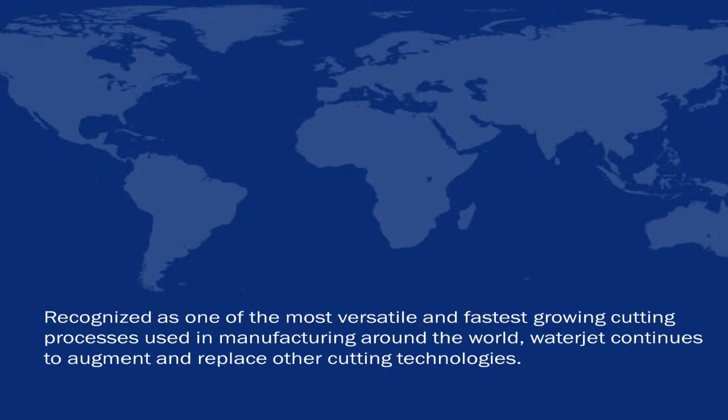And we're going to tell you a little bit more about the key components in selecting a waterjet, some of the trade-offs between technology and the advantages of Flow International and our long history, our breadth of product, and our technology. So Flow is recognized as one of the most versatile and fastest growing companies in waterjet, and waterjet itself continues to grow in popularity and applications. As we've expanded the capabilities and the ease of use, we've seen more and more customers needing this technology for its versatility, for its no heat effect, no post-processing, and for being a green process.

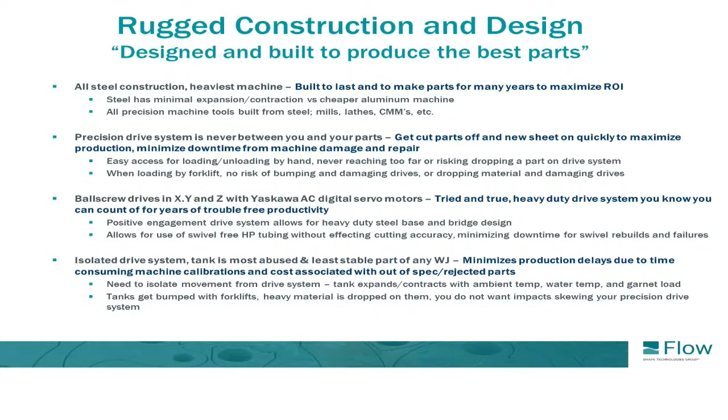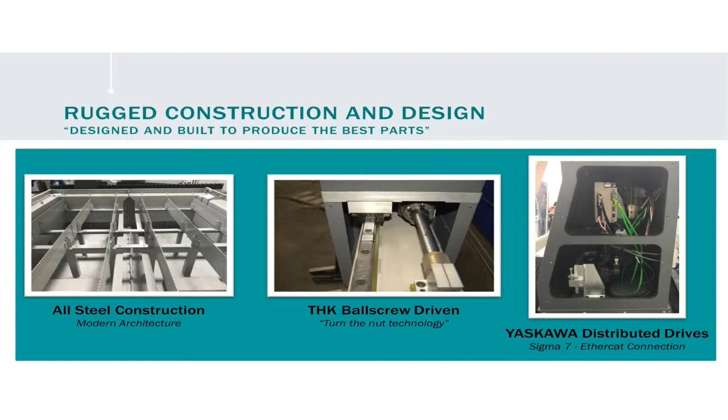World-class service and support. Again, along with the structural integrity of our machine and the technology that we could offer, this is truly what separates Flow from our competitors. Our service, our support, our tech service, our engineers are all local in this territory. We have over 11 technicians in the Northeast alone. That means that we're not flying people from Ohio or Washington to give you service. We're an hour or two away and can be in your shop as you need us.

That's very important to us, and something that we rely on. We also have local tech service management right here in the Northeast as well. So you're not calling a corporate 1-800 number. There's someone locally who can manage the schedule and get you the service you need when you need it.

Flow offers a wide variety of service options. You could, of course, always call in with any unexpected issues. We have 24 hours, 7 days a week phone service. There's also a Flow app that you can download right on your phone, and you can interact and get support right through the Flow app without having to go back to your computer.

And then there's also maintenance plans that come with our new machines, which have Flow in to help service your machines before it's time for rebuild. So we are eliminating the challenges of the break-fix model that our competitors use and that water jet suppliers have used traditionally. We put you on a maintenance schedule where we keep track of your pump hours, and every 500 hours of runtime, we will be in to rebuild your pump, inspect the machine, and make sure your machine is doing exactly what you need it to do.

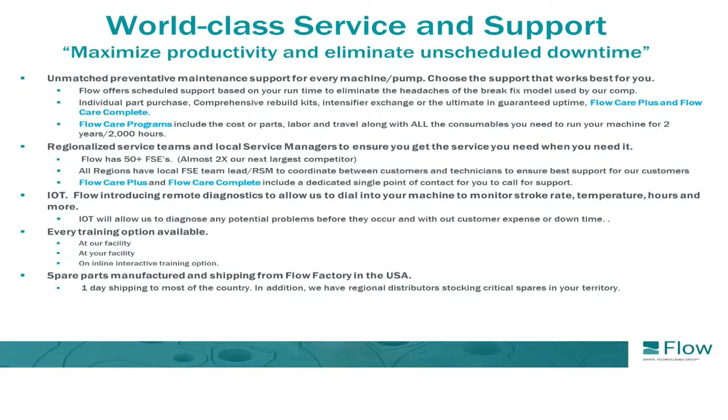Oh, spare parts. Spare parts as well separates us from our competition. We manufacture and stock our parts in Baxter Springs, Kansas, which is 1-day shipping. And we're also stocking parts right here in Harrisburg, Pennsylvania at Mid-Atlantic Machinery to eliminate any lead time for your water jet needs. Mid-Atlantic also has a technician available in addition to our 11 guys from Flow. So again, another layer of support.

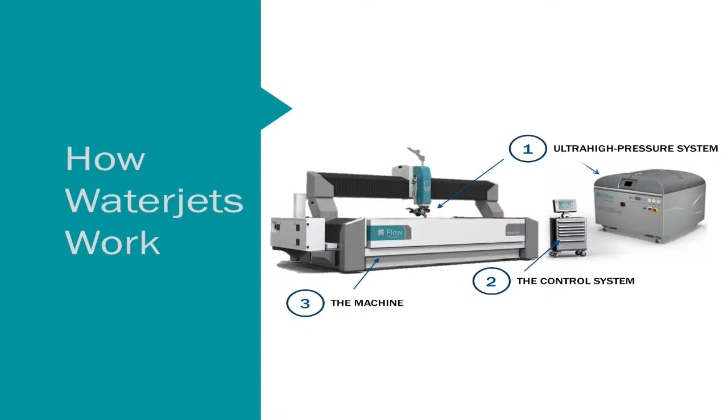So how water jets work, and again, there's a lot of information, so we're gonna go through this relatively quickly.

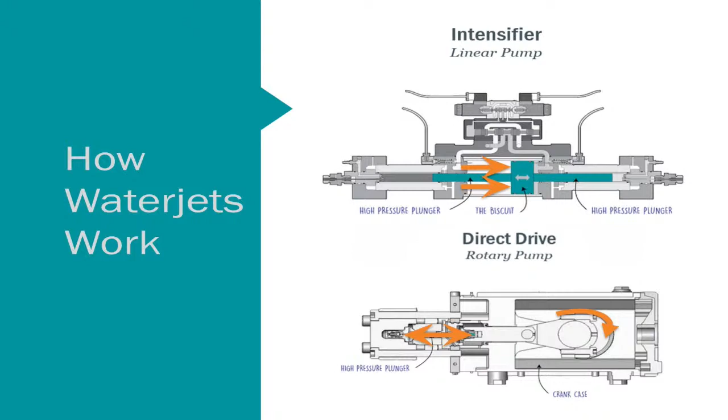All of our competitors offer one or the other. The vast majority, just about all, only offer the intensifier pump. There's only one supplier I'm aware of that's still offering the legacy direct drive, and that's Omax. And they both have their sweet spots. It depends on what your production and application is. That'll dictate which pump makes most sense for you. And again, we're the only supplier who can offer every pump option available in the industry.

So abrasive water jet, you generate pressure at the pump between 60 to 90,000 PSI. That water gets pumped through to our cutting head through the overhead whip. Some of our competitors have plumbing that requires swivels, so you're pushing the water back and forth. Those are maintenance sore spots, and you also lose pressure with every swivel you go through, which is why Flow uses the high pressure whip to eliminate any of those concerns.

So that high pressure, that 87,000 PSI and whatever horsepower pump that you're using, gets pushed through to your cutting head. That's where that pressure is turned into velocity. And then after going through the cutting head, you go into the mixing tube where you pull in the abrasive, the garnet, and it allows you to do that cutting on hard materials.

There are many materials where you don't need abrasive. Softer materials, whether it's gaskets, rubber, foam, softer plastics, you could cut those with water only, which will give you a thinner stream of water and also saves you on the abrasive costs. And it has some advantages. The rule of thumb is that anything that you can cut with a household scissor, you can cut with water only. If you can't cut it with a scissor, you're going to need abrasive.

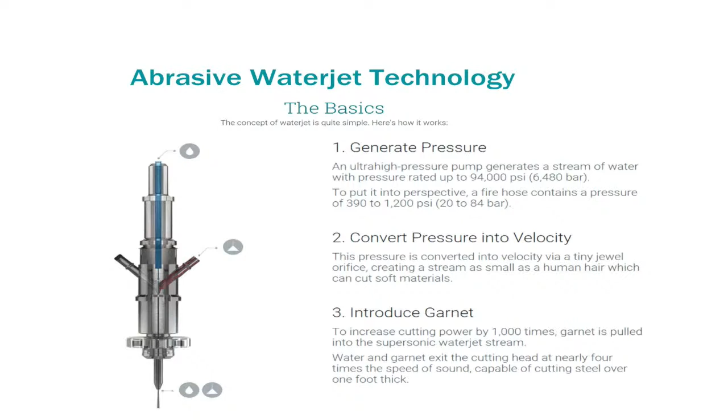So again, this shows you a closer view of the process. The water comes in, abrasive gets pulled in using the Venturi process, and then comes out through the mixing tube. If you're cutting more sensitive materials, brittle materials, glass, composites, anything that could see fractures, micro cracking, delamination, you may need a vacuum assist, which is a very cheap add-on to your machine, probably under $1,000.

And what that vacuum assist does is gets the abrasive going to the mixing tube without the vacuum process. So it pushes the abrasive using your air compressor as opposed to pulling it in. And this allows the abrasive to hit the material with the water at the same time, which eliminates all micro cracking, micro fractures, and delamination.

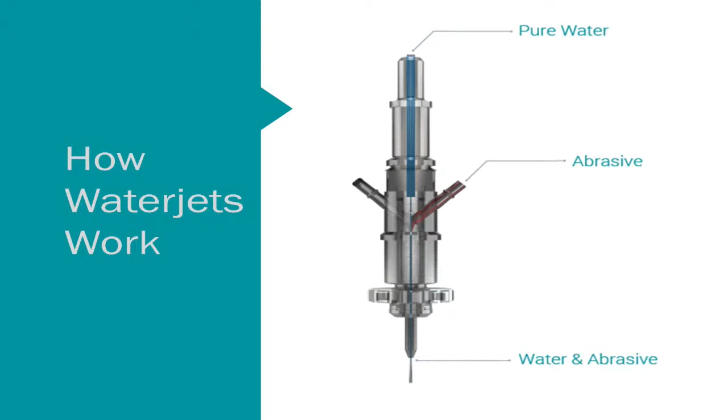So the advantages of water jet: cold cutting. It's a no heat process, so you don't have to worry about the HAZ or heat-affected zone that you'll see with some other technologies. The major advantage above all of these others probably is the versatility. What makes water jet unique compared to laser and plasma, which all have their sweet spots, is the ability to cut any material and any thickness. You can go from steel to stone to glass to rubber to wood with no changes to your setup. It's very easy to cut all those materials without doing anything special, without having to spend a lot of time changing your setups.

And again, the thickness. Water jet will cut through virtually any thickness material. The machine that we're going to be showing you today has a 12-inch cutting capability. You can get that same machine with a 24-inch capability or beyond. So whatever your requirements, as thin or as thick as you need, the water jet will be able to bring value. No stress added to the part. Again, it's an erosion process more than a cutting process.

And then the ease of use. You can go from art to part in a matter of seconds or minutes. You're working from any native file format. Our application specialist will show you in detail just how easy it is to get parts cut on your water jet.

And then environmentally friendly. The waterjet is a green process. You don't have to worry about hazardous waste or hazardous materials. The abrasive comes in. The vast majority of customers are using garnet, the Barton garnet, which can go to drain, it can go to your dump, it can go to your landfill. There's no special handling or requirements needed. And the same with the water. The water can go right to drain.

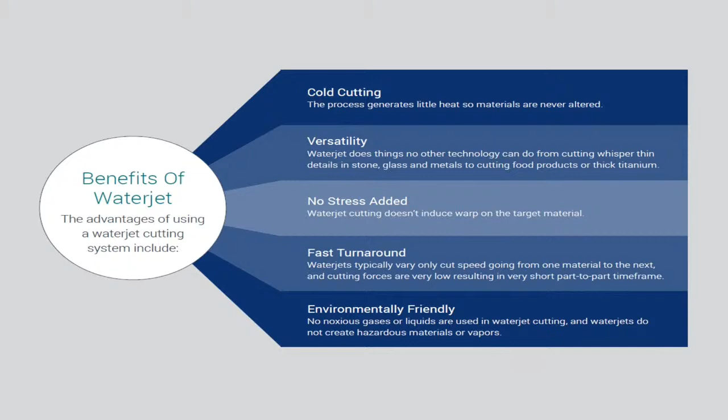Again, all the different materials that we can cut, whether it's Inconel, titanium, stainless. The only material in the world that I've seen waterjet struggle with, and this is across all waterjet suppliers, is tempered glass. Tempered glass, as you apply any pressure to it, it's designed to shatter. But we're working on it.

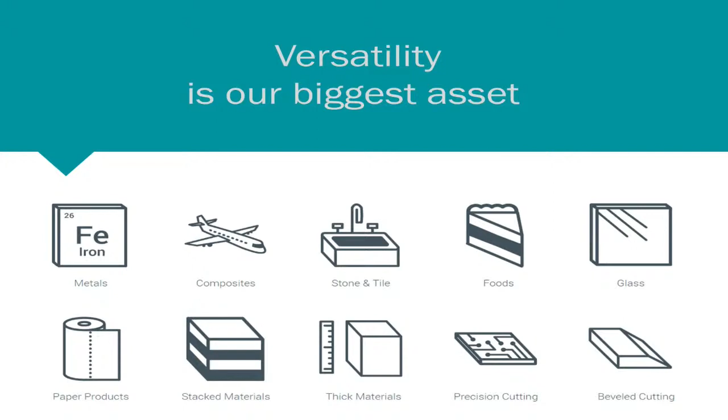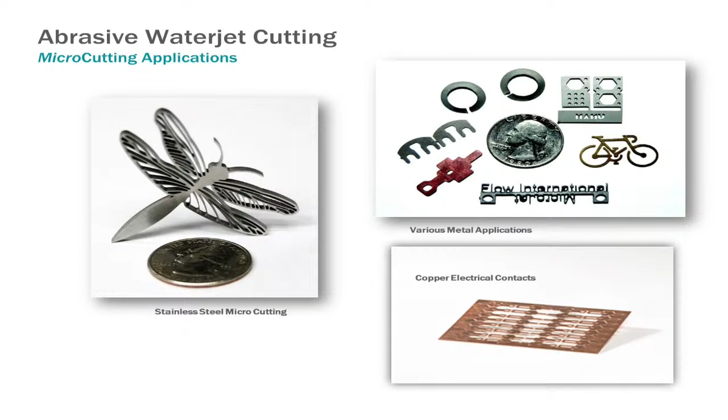And here's just some examples of some of the applications that you'd be able to do with the waterjet, whether it's extremely fine and detailed work. With pure waterjet, you can get down to 5 thou kerf. With abrasive waterjet, it's a little over 30 thou, about 33 thou. It's usually 10% over the size of your mixing tube. So again, the ability to cut extremely precise and intricate parts. Nesting as well, and again, just showing you all the different applications that you can use for waterjet.

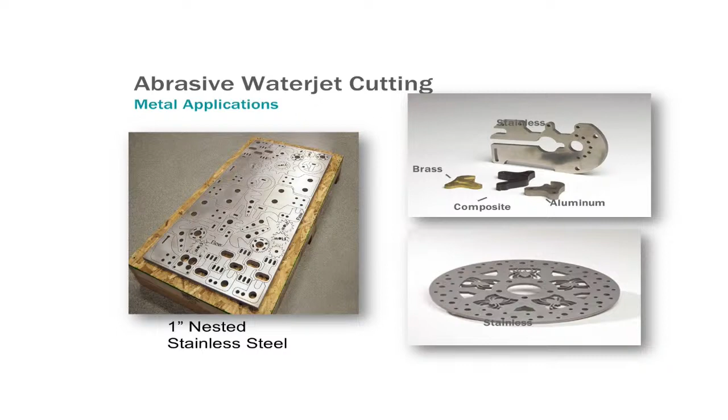We talked about thin, and we could also talk about thick. We've got a lot of customers today cutting 12, 14, 16-inch various material. We have a customer up in Rochester that's been cutting 14-inch glass for a space application with the same Flow machine since 1995. Again, that speaks to the quality of our machines. You can have a 30-year plus machine cutting space tolerance parts without any issues.

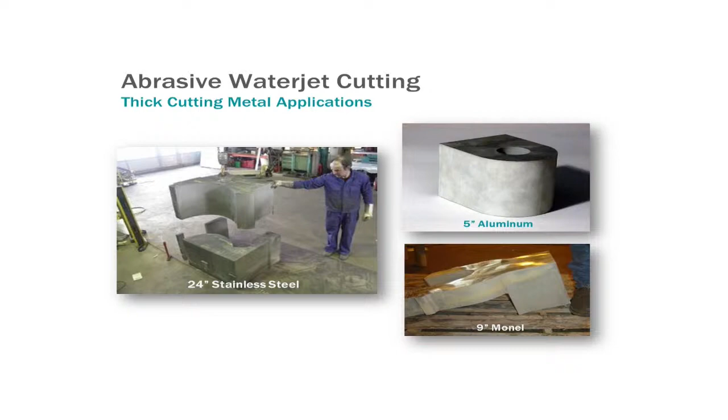Waterjet supplements a lot of other tools in the industry, whether you already have a plasma or a laser. The waterjet will bring value and bring capability and open up applications that you couldn't cut with some of these other technologies. And that's because of our versatility and the process itself.

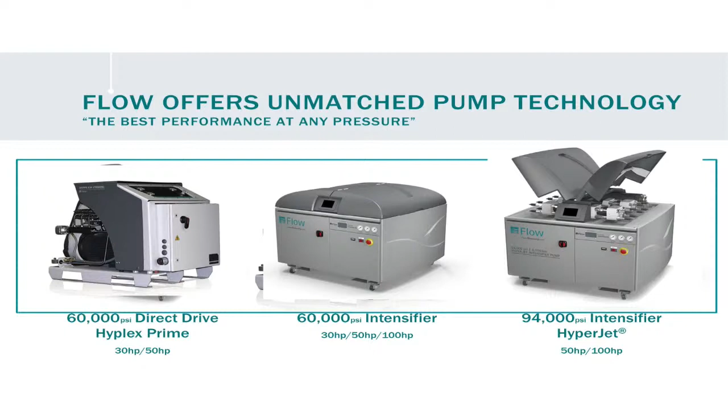So pump technology. We mentioned that Flow invented every pump style available in the industry. So that starts with the legacy direct drive pump. Again, tried and true. It'll be able to cut all the same materials as an intensifier pump and even a higher pressure intensifier pump. The difference is going to be speed, operating cost, and maintenance. So the intensifier offers more flexible maintenance, less maintenance, and it also allows you to cut faster and reduce your operating cost. And we'll talk about how we do that in these upcoming slides.

So this is why the vast majority of our customers have moved to this hyperpressure, to this 87, 94,000 PSI, because they're able to cut 20, 30% faster while reducing their operating costs by close to 50%. And that is huge. So the biggest operating cost with waterjet is that abrasive, that garnet that gets pulled into the system. It's not expensive, but you use a lot of it.

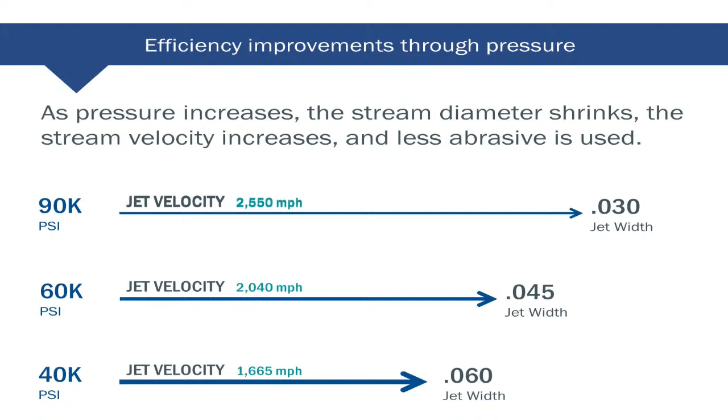So abrasive garnet costs about 25 cents a pound. And depending on your pump, you're using between 0.8 to 1.2 pounds plus of abrasive. By going from the 60K pump to the 90K pump, you're bringing down that abrasive usage from 1.2 pounds a minute to 0.8 pounds a minute. And that has a huge impact on your operating cost, which allows you to see more profit and be able to quote more aggressively to your customers.

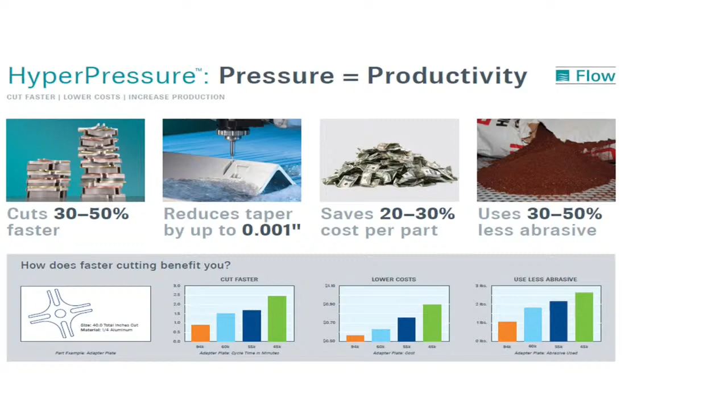So here's illustrating some of the things we were just talking about. Again, cutting 30 to 50% faster, reducing that kerf or that taper by having that thinner stream of water that is entraining less abrasive. You're also able to cut finer detail with that higher pressure pump than you could with the 60K. Very critically is that cost savings. Like I said, you're going to use 30 to 50% less abrasive, which translates directly to operating cost savings.

And this speaks to the speed difference by going from 60K to 90K. You could see as you go up in pressure, you're increasing your speeds, you're reducing your cycle time. This is a tremendous advantage of the higher pressure pump, and again, the reason that most of our production customers have moved to the higher pressure.

And we do offer every option. So if you're not running full out, 6 hours a day, 8 hours a day, 18 hours a day, a direct drive might be a good option for you. And we have the best direct drive in the industry, more modern and up to date than any of our competitors.

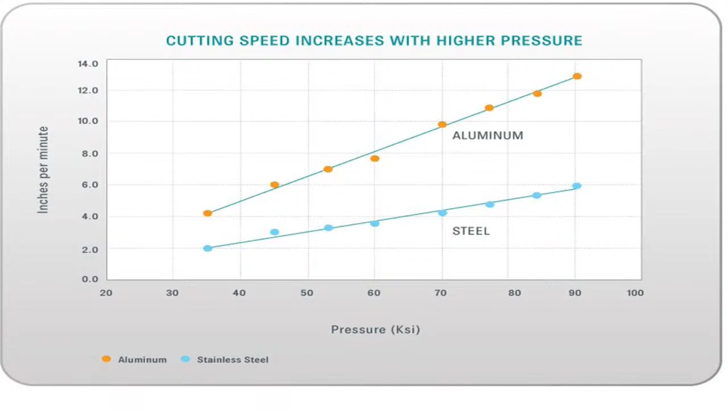So as I was saying, as you go up in pressure, you're reducing that diameter of your jet stream. That equates directly to abrasive usage. If you look at the bottom of this screen, you could see by going up in pressure, you're increasing the speed, you're going faster, and you're reducing your cost.

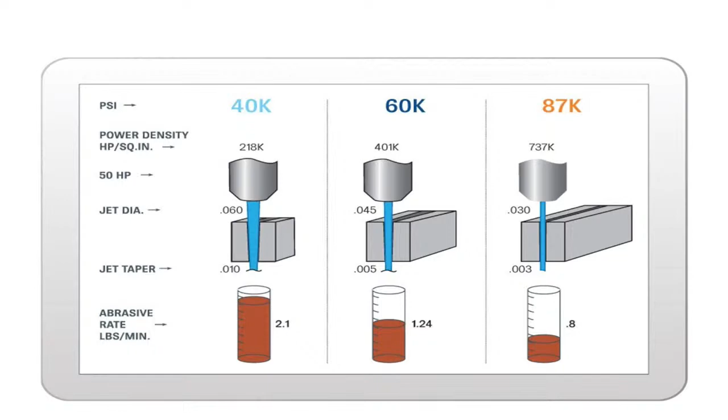That makes the higher pressure pump make a lot of sense for a lot of customers and a lot of applications. But please, let us have the conversation. Let us talk about what you guys are doing. We want to learn more about your process and see what you need from us to bring value.

You can run them below their max rated capacity of 87K and still be going significantly faster than a 60K pump and still saving a lot of money on abrasive. And you can extend those intervals from 500 to 1,000 hours or beyond. So it's available in all horsepower options, 50, 100, up to 200 horsepower and beyond.

This is key. So the intensifier pumps use slow stroking hydraulic technology. So the intensifier pump compared to the direct drive pump: the direct drive pump has 3 cylinders to rebuild every time you do the maintenance compared to the 2 cylinders of the intensifier. So it's 33% less maintenance every time you do those rebuilds.

And the reason why the intensifiers have less wear and tear is they're much more gently stroking. So a direct drive from Flow or from our competitors, you're going to be seeing a stroke rate of 700, 800 strokes a minute. An intensifier only strokes 70 to 80 strokes a minute. That is proportionally less wear and tear on your pump, and again, extending those maintenance intervals.

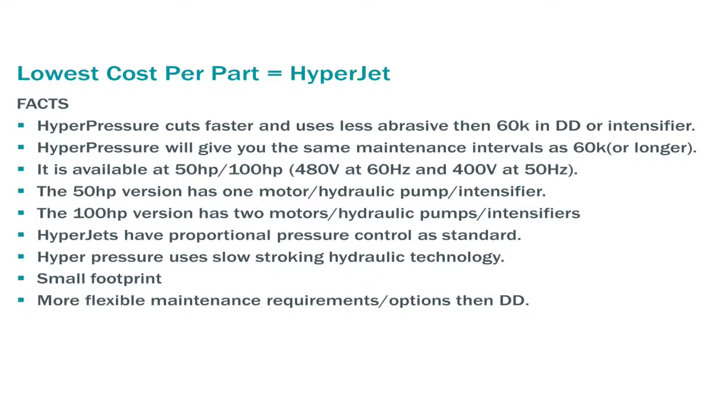And also, another key advantage of the intensifier is that you could swap out that complete unit. So if it's time to do a rebuild and you're in the middle of a big job that you have to get out by Friday and you don't really want to spend a couple hours doing a pump rebuild, you could take your intensifier pump off your pump cart, put in a replacement intensifier, continue to cut, and then go do the rebuild on your intensifier at your convenience, whether it's on Saturday, the following week, or whenever works best for you.

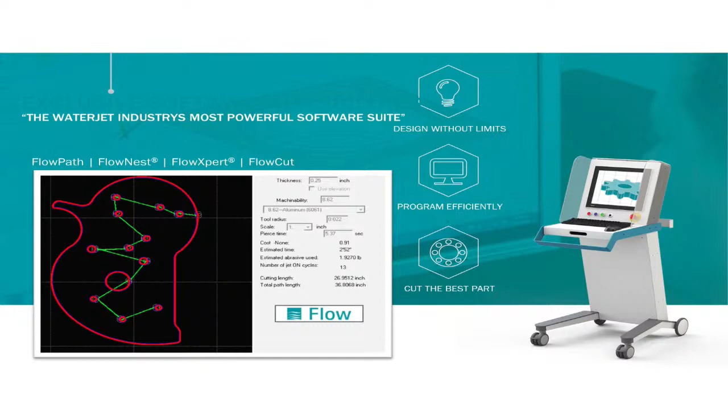So our software, the machines run off a proprietary software, FlowXpert, Flow Master, extremely intuitive, extremely easy to use, Windows based. It's a CAD CAM package. We're going to be walking you through the software programming and just how easy it is, working from any native file format. Our application specialist will be showing you that in a couple minutes here.

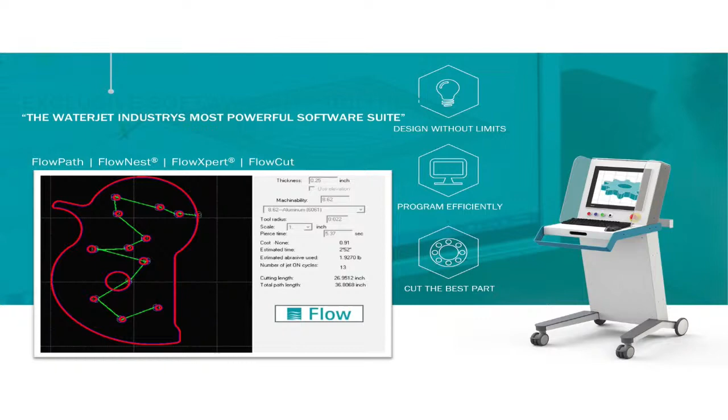So another advantage and what customers love about our software is that you can quote a job without cutting a part. So if you have a customer that's looking to potentially give you some business for your water jet, you can take his file or take his drawing, run it through our software in a matter of minutes, and our software will tell you exactly how long it's going to take to cut, how much abrasive you're going to use, what your operating costs are, and it'll give you all the details that you need to quote intelligently to win and to be profitable without doing any extra work.

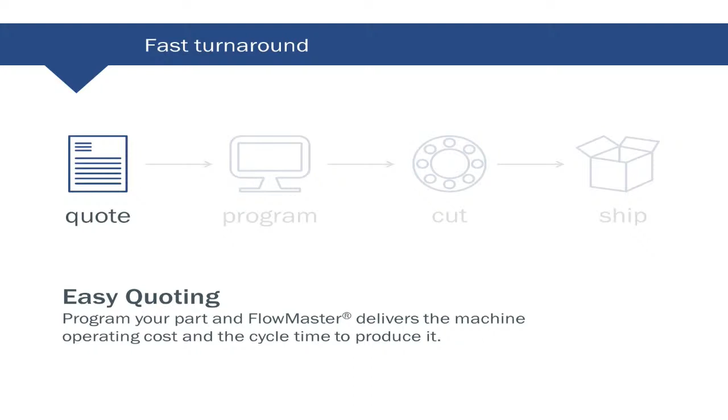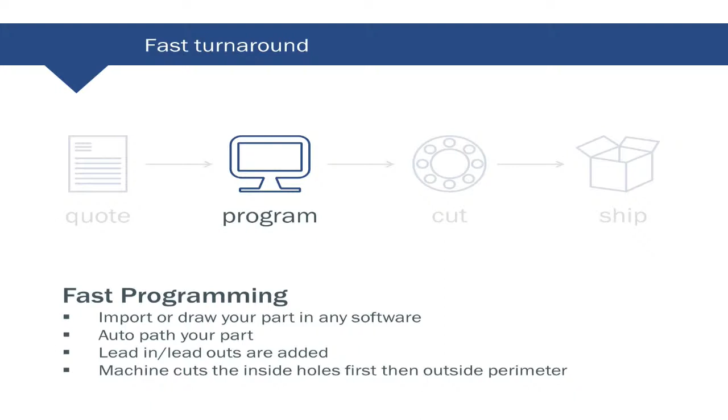And again, extremely easy programming, working from any native file format, and DXF or others, and we'll show you all of those. The machine will path the part for you, or you can path it manually. Lead-ins, lead-outs are added automatically. As a rule, the machine does the inside geometry first and then goes to the outside. But again, what separates Flow from our competition is the flexibility of our software. You have the ability to change the order, change the path, change the speeds, anywhere from 0 to 100 at the touch of a button.

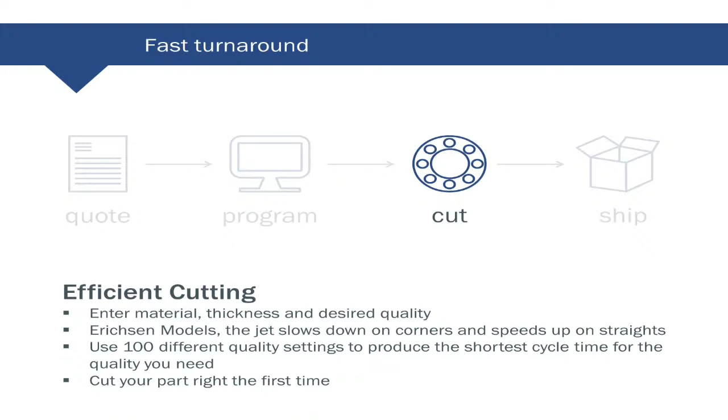And once you program, you can take it right to the machine. You can either be networked, or you can throw your file on a jump drive. You can program right on the roll-around console as well. And then you just tell the machine the material type and the thickness, and you're cutting.

So options as far as performance and precision. There are choices out there as far as technology. Legacy technology is the conventional water jet, straight up and down cutting. Still see it at a ton of customers, good accuracies. The limitations on that conventional cutting head is that you're not going to have the same features as a Dynamic or Dynamic XD, specifically taper compensation.

So as the water jet's cutting, and especially cutting through thicker materials, that stream of water will start to spread from any supplier. This is inherent to the water jet technology. So you'll start to see an angle on your material, or if you don't slow down the cut significantly, it'll give you taper. So you'll have an angle on one side of the material. A taper compensating cutting head accounts for that taper. It angles the cutting head up to 10 degrees to clean out the cut and ensure perfect perpendicularity top to bottom.

And it also allows you to go faster than a conventional water jet, because that dynamic cutting head will angle forward as you cut. So instead of the water jet trailing back and waiting to clean out the cut, you're actually tilting forward, which allows for much greater speeds and acceleration, specifically in and out of corners.

And then lastly, our Dynamic XD cutting head, which is a 5-axis cutting head, offering up to 60 degrees of true angle cutting. This is a superior solution to anything our competitors offer. Our 5-axis cutting head is faster and more accurate than anything that you'll see from any of the other competitors out there. And that's because of our design being a 10 degree, 60 degree cutting head wrist. It allows us to cut up to that 60 degrees and beyond without having to wind and unwind like our competitors, A-Jet and others, have to do.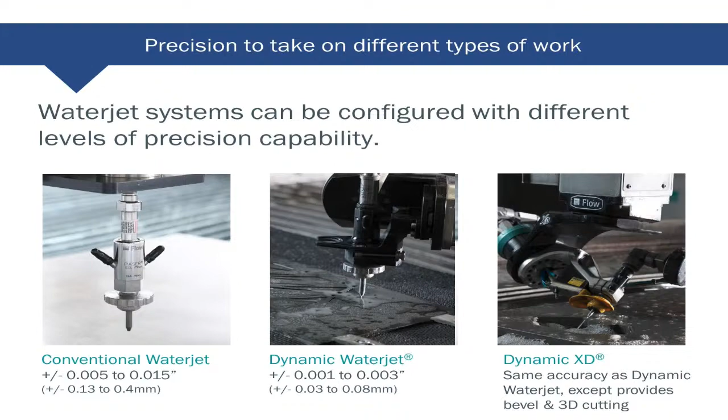So broadest product range. Again, what makes Flow different and separates us from our competition is our focus on structural integrity. Our all-steel ball screw-driven machines are superior to anything out there from the competition. Our service and support is local, present, and engaged. We're not flying in from elsewhere. And then our technology, specifically our pump technology and cutting head technology. And then lastly, it's our product range.

We offer a system for every application, starting in that 2D small 4x4 cutting and going up to the extremely large, 40-foot dual bridge, dual head, full quad head machines even, rotaries, whatever attachments or features are available on our machines. So Mach 100, Mach 200 are entry-level units offering the cantilever style. They are workhorses that have been around for a long time, starting again in that 4x4 size and going up to a 6x13 or 6x12. Then our Mach 300, Mach 500, which is our flagship machine, offering every feature that we could offer.

Whether it's 5-axis capabilities, the vacuum assist, multiple heads, multiple bridges, every feature that we offer is available on these Mach 500s. Then the Mach 700, which is large format, and the NanoJet, which is a precision machine. I happen to love the NanoJet, tolerances down to 4/10, a fully enclosed system used primarily for aerospace and medical.

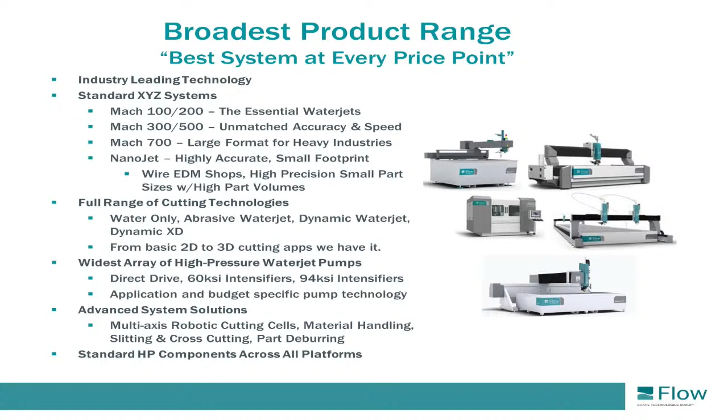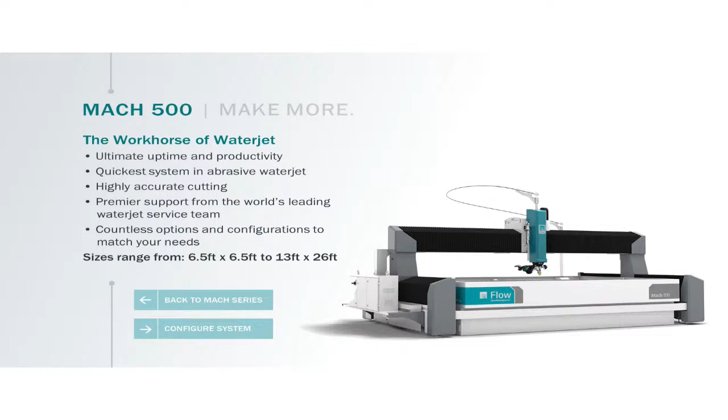So looking quickly at the Mach 100, again, this is our entry-level option, 7-inch cut capability, starting in a 4x4, very cost-effective. We have customers who've had these machines for years and years and absolutely love them. So I jumped over the Mach 200, which is pretty comparable to the Mach 100. The difference between the Mach 200 and the Mach 100 is the 5-axis capability. All other features are the same.

And then the Mach 300, Mach 500, it offers the ultimate in productivity, speeds, and performance. This machine goes up to 12-inch cut capability standard. You can go up to 24-inch and beyond as well. It's the fastest system in the industry across all of our competitors. Again, offering that 0.1 G of acceleration, 700 inches per minute of rapid traverse, and every feature is available. And this starts in a 6x6 cutting space, and it goes up to a 13x26 or really a 13x27. And then we can go even larger with the Mach 700.

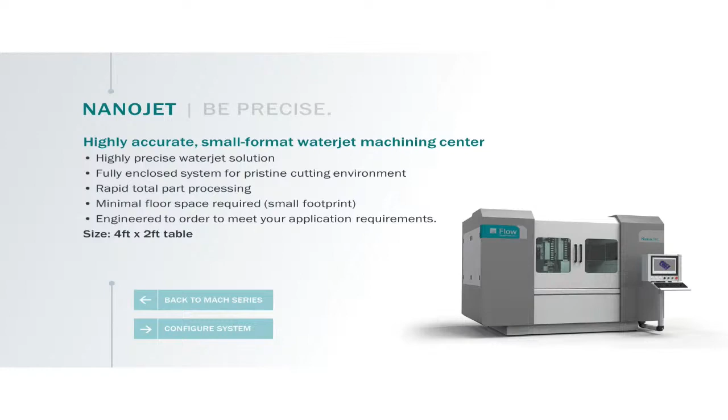And then the NanoJet, again, this is a pretty specific and unique machine. This is not a one-size-fits-all solution. This is very specific to applications. We see it primarily in aerospace, and it's because of its precision tolerances. The majority of our machines, the Mach 500, is going to give you 1 to 3 thou all day. The NanoJet gets you below 1 thou. The NanoJet takes you to 4/10 or 0.0004 for the most precision, the most accuracy available from anybody.

So we are WaterJet. That is all that we do. Again, we've been around for 40 plus years, invented the technology, more machines than all of our competitors, more service people than all of our competitors.

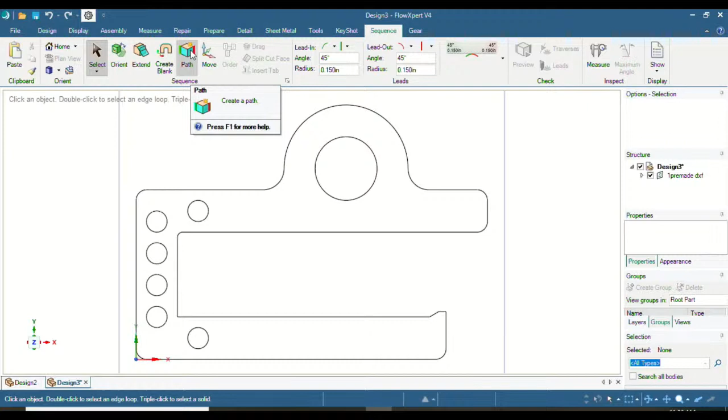We're going to go to the Sequence tab up top, and we're going to hit the Path button. And this is how easy it is. Like Jody mentioned earlier, from design to part, you can get it done in 5 minutes. It's extremely easy. So there we go. It recognized the part and the planes, and then we're just going to hit this check mark to calculate the flow path. And there we go.

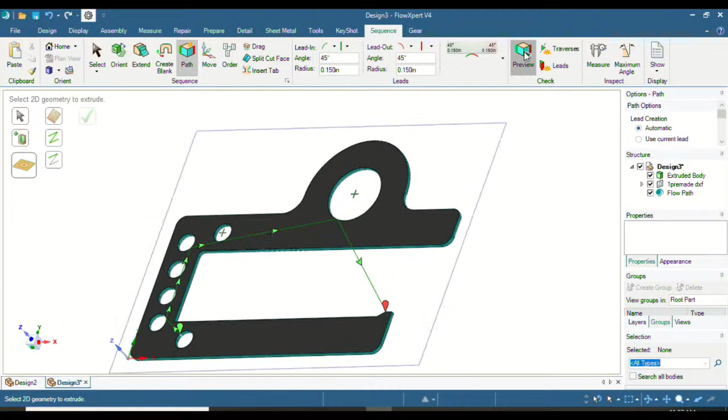And full training is included with the machine. So if you move forward with a Flow, we will do a one-day training as we install the machine, and then you have the options that we discussed as far as whether in person at our facility or at your facility. And it's very quick and easy, and we will teach you everything that you need to know.

Yes, good point, Jody. So yeah, as you can see, it was just super easy to path this. We have the water jet path. As Jody mentioned earlier, it does do the inside geometry first, and then it finalizes it with the outside cut. So then from there, you just go File, Save As. You can save it to a USB drive, or you can save it to your network, and then you can take it right to the computer. So that's just a quick demo of how to import a ready-made DXF.

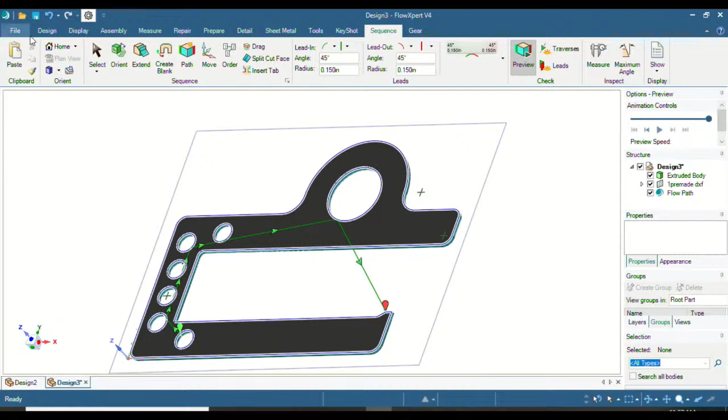Next, I'm just going to create a quick file here that we're going to cut on the water jet machine today. So here we go. We'll start with a new design. We'll go to the top view. We're going to go to the Design tab. So the Design tab has a whole bunch of features here, from circles, rectangles, lines, spline.

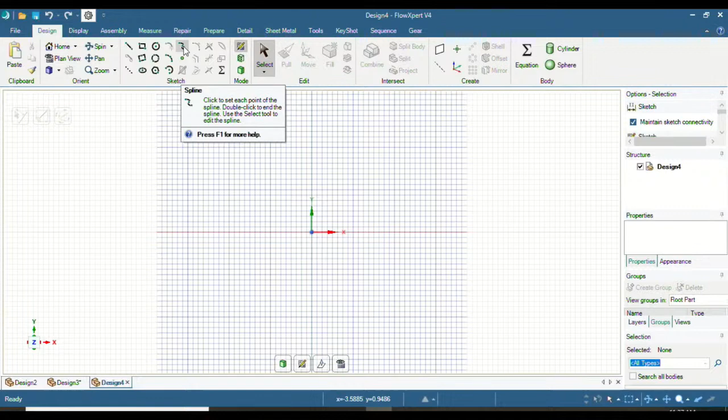And a really neat feature about FlowXpert is that any time you can hover over a tool and hit F1, and that'll bring up a full how-to guide on how to use that tool. So it's super, super convenient. I learned this software within a week, pretty proficient after a month, but super easy to use, and the help guide is very nice. You didn't have any CNC experience going into that? Yeah, no CNC, and this is pretty straightforward.

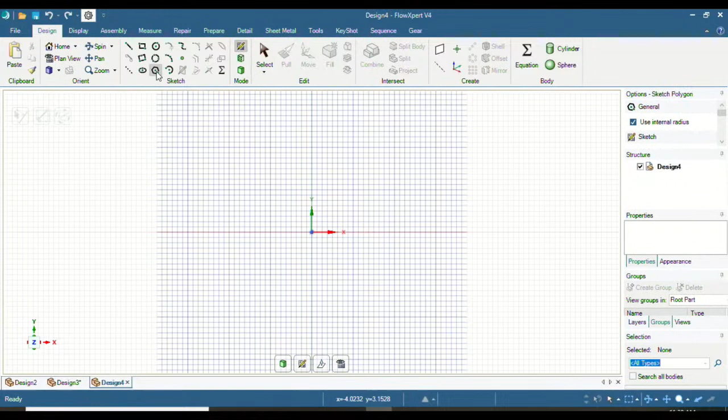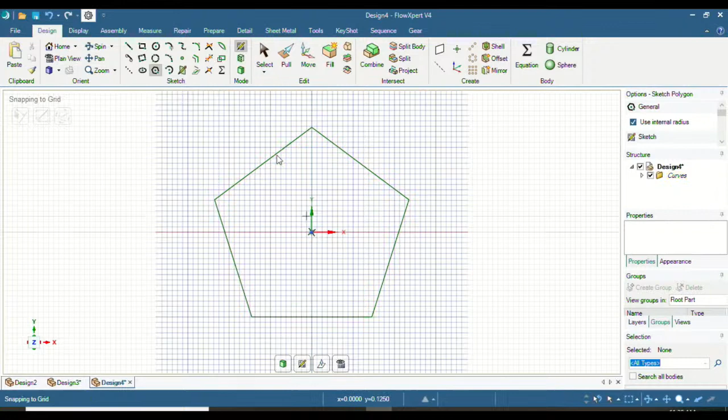So we'll start off, let's see here, we'll draw a pentagon. So we'll start with a pentagon. We'll make that 4 inches in diameter. There we go. And this is just going to be a part that we're going to cut today on the water jet. There we go. So then from there, we're just going to draw a line. And then this is one of my favorite tools here, the trim away. So you can basically trim away any geometry that you don't need, and it just recognizes it perfectly like that.

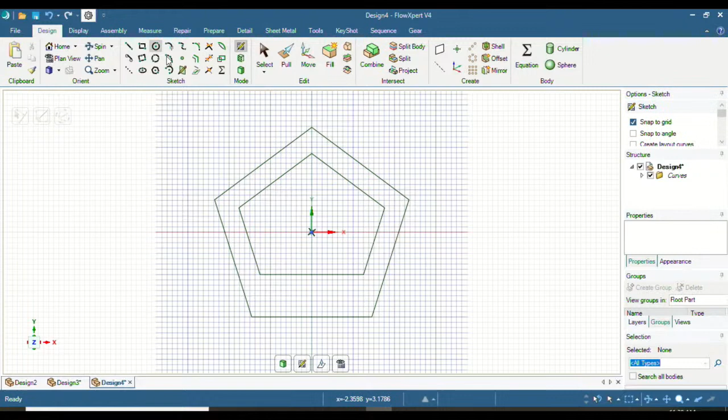Can you do different sizes or different parts of the same drawing at different speeds? Yes, correct. Yeah, so we'll be showing that on Flow Cut, but definitely. So yeah, here's our little part we're gonna make today. So I just designed this under a minute. From there, we now have to extrude this to turn it into a 3D model. So I'll just show you some of these features of FlowXpert here.

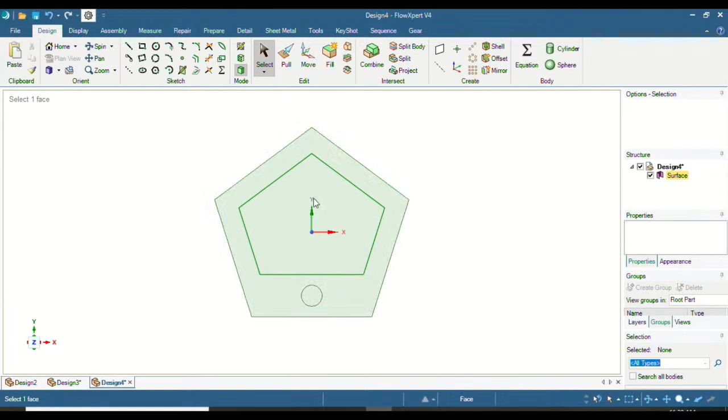So here we have our 2D object. And now from here, we're going to use the pull tool, and you can pull that geometry to the thickness that we're going to do for our cut today. So we're going to do 1/2 inch. We're going to be cutting 1/2 inch aluminum. And this is what our final product will look like off the machine.

So just to show you some other features here, you do have full capability to add chamfers. So you can add a cool chamfer like that. That is a water jet capable part to cut. So just really, really neat what you can do with this software. You can do a countersink if you'd like. So super neat, easy to program, and then we'll get right into how easy it is to path this part.

So once again, you go to sequence, you go to path. It automatically recognizes this 3D part, and then all you've got to do is hit calculate flow path, and it does it automatically. It's an automatic Flow water jet path. Puts all the lead ins and lead outs for you, and then you're good to go. I'm just going to show you how you can adjust a few settings.

So what I really like is this here is a lead in and lead out straight. I can adjust that to an arc in and an arc out. So I would always recommend that for circles. You just get a nice clean circle. We'll adjust the lead in and lead out lengths. Same with this one. So super user friendly. You know, this isn't anything too complicated.

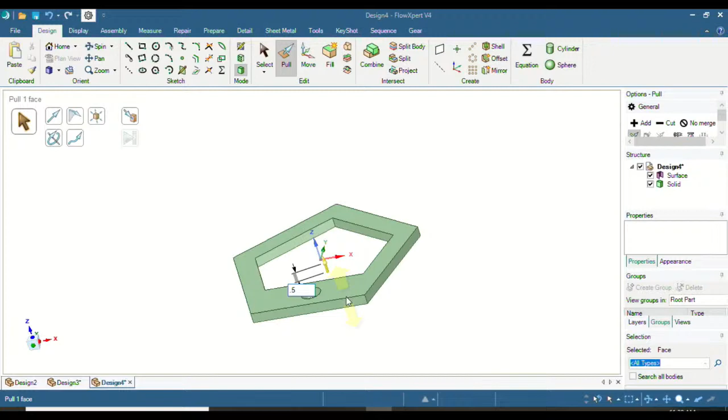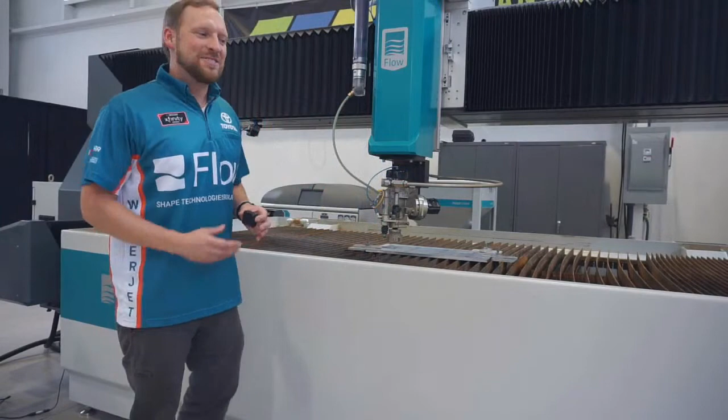All right, I'm back. So here today, this is our Mach 300. This is a 5-foot by 10-foot table. It has a 12-inch Z. Now one thing to note about the table size is this is a 5 by 10. We do have machines with table sizes that go up to 40 feet by 13 feet. So you can have a whole bunch of different customizable sizes, and it's all based off your application and what you need.

12-inch Z height. So this cutting head can go up to 12-inch Z, so you can cut up to 12-inch thick material on this specific machine. As Jody mentioned earlier, we do have 24-inch Z height if your application needs it. We have the abrasive hopper in the back. That's a continuous fill 900-pound hopper. So that means that while you're cutting, you can actually continue to fill up the abrasive. You don't have to shut your program down and fill it up. So super nice. A lot of customers love that.

Back there you'll see our Hyperjet. That is a 50 horsepower, 87,000 PSI intensifier pump. That is our signature pump. A lot of customers love it due to the cost effectiveness of it and the cutting speeds. It's a really big improvement over the 60,000 PSI. And then lastly, we do have the computer over here, as you saw earlier. But yeah, that's really about it.

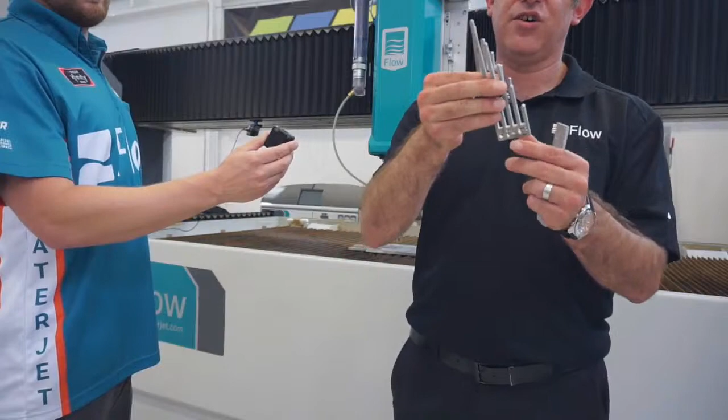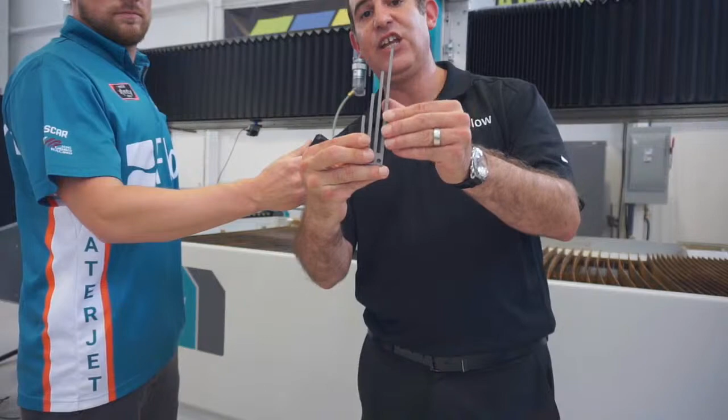Show this. Yeah, I don't know if you want to talk about it. So again, real quickly talking about the difference in pressure and speeds. These two parts, one was cut at 60,000 PSI, one was cut at 94,000 PSI. Each of these were cut at 1 minute, and you can see the difference in the increase in productivity from going to the higher pressure.

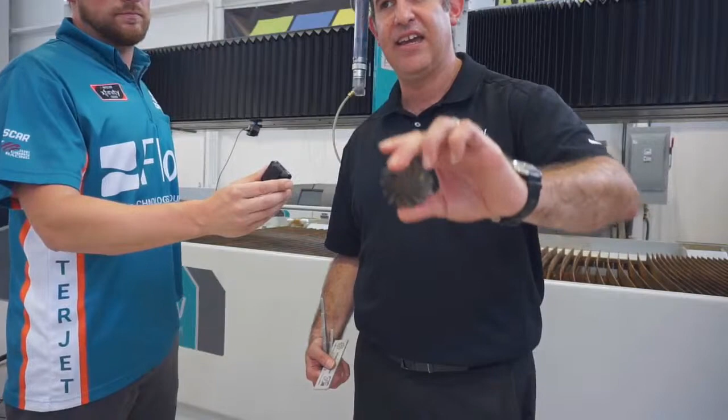Also worth showing you, we're doing some big parts today, but you can do very precise work as well, down to that 30 thou perf. And the last part I want to show you before I hand this back to Eric is some of the 5-axis capability. This tool steel was cut on a 5-axis Flow machine in one pass. And that's definitely something that's unique and not all suppliers could do.

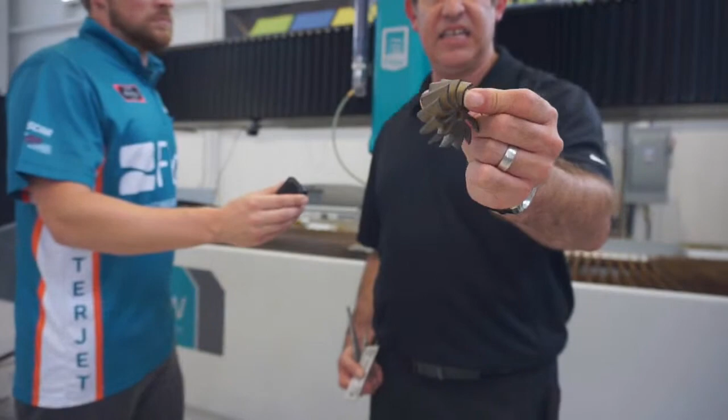Thank you. Awesome. Thanks, Jody. So yeah, what do we say? Let's cut this part that I just programmed. Sound good? All right, let's do it. Let's jump right over to the machine.

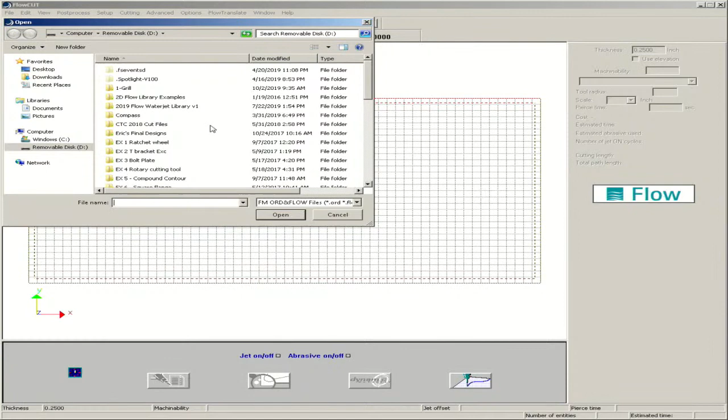All right, so I just inputted the USB drive. From here, I am going to pull it right off the USB stick. So let's see, here we go. And there it is, thank you. So then from here, I just want to move all entities into our cutting space.

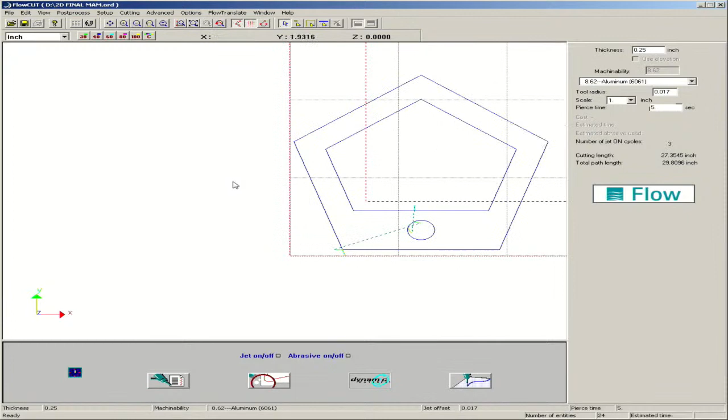Like so. So now this software here, let me back up a little bit. This is FlowCut. This is the machine software that allows you to cut your design part. It has many functions. It's pretty straightforward. I'll show you some features on here, but there are many to be had.

So we'll start up here in the top left. This is where you're going to put in the material thickness. So today we're going to be cutting 1/2 inch aluminum, so we'll put in 1/2 inch there. And then one of our signature features is our material list. So we have over 100 different materials to choose from here, all the way from PCD all the way down to rubber. So it goes from softest material to the hardest material you can cut.

And our software is automatically going to calculate, based on the thickness and the material type, how fast it needs to cut to get that edge quality. So let's see, let me find aluminum here. Aluminum bronze. We got 6061. Yes. So speaking about edge quality, this part we're going to cut today, we're going to cut at 5 different cut speeds. So one cut speed is going to be 20, 40, 60, 80, and then we're going to do some custom cut speeds in there, which is what our software is capable of doing.

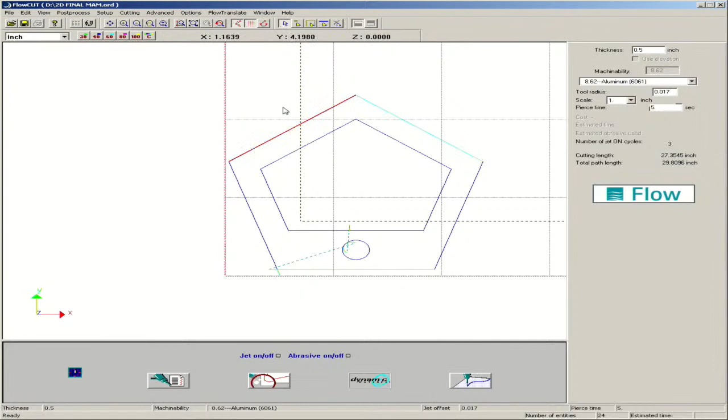So let's start with this bottom line here. We're going to put this one at 20%. So up here in the top, these are the different cut speeds, 20, 40, 60, 80, and 100. And we do have this custom setting here, which I'll go over in a little bit. So we'll do 20. This one we're going to keep at 40. This one we're going to do 60, 80, and then this one here we're going to do custom. We're just going to put this one at 90.

There we go. So some parts of your part, you may not care about what the edge quality looks like. It's maybe interior to the application, so no one's going to see it, and so you just want to go as fast as you can, in which case you would go that 90, 100%. But other parts of that same part, you may need to be smooth and as smooth a finish as you can get, and you have the options to have all those features on the same part with Flow.

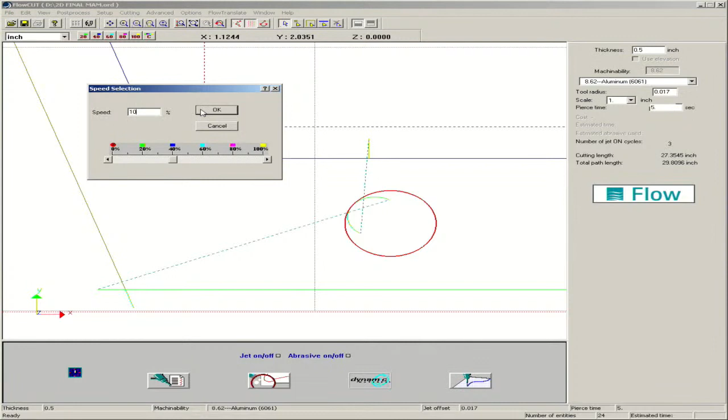Exactly, yeah, good point. So on this hole, I'm going to set this speed at 10%. So we really want a nice, smooth, accurate hole to be tapped later on. So we'll put that at 10%. So perfect. From there, we got all of our geometry. We got the speed set out that we would like. From there, we're going to go right into running the machine.

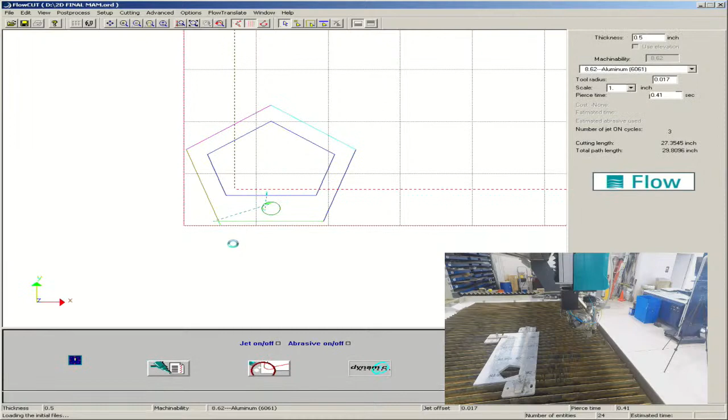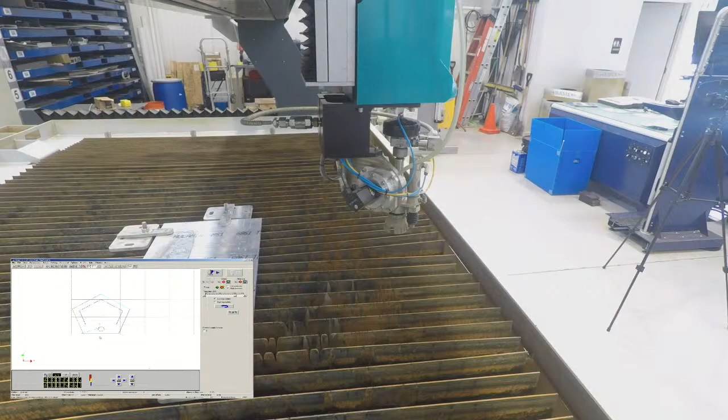So this is going to be a water and abrasive setup. We hit OK. And it's pretty simple. This is pretty straightforward. I do have to set the home. I don't know if you want to jump over to the machine. I can set the home for this part. So we have our material on the table here. I'm going to jog the machine over, and we're going to find a nice spot on this 1/2 inch aluminum to cut this part.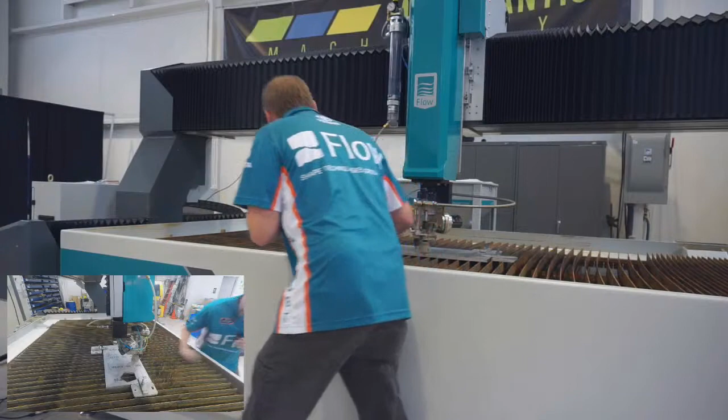So one thing to note when cutting with a water jet, you need your standoff distance of that mixing tube to be about 100 thousandths off from that material. So I'm just going to kind of tune this in right now. Perfect. Slides right under. And then from there, we're going to set our home, maybe just a little bit over, right there. So we're going to set that as our home. You can jump back to the software. And then we're going to set that as our user home.

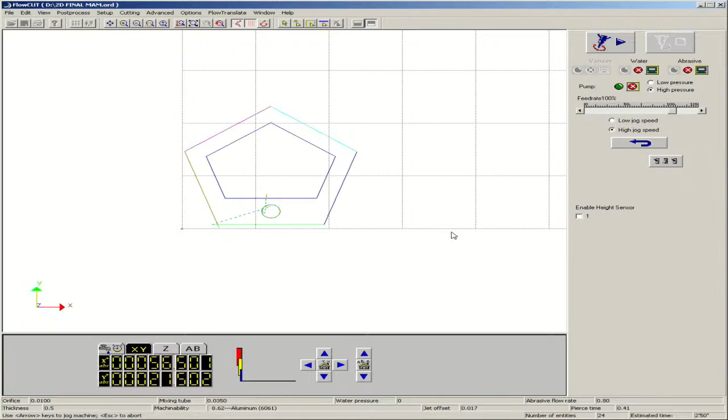Perfect. Now from there, we can basically cut. So I'm going to turn on the pump. You're going to hear it ramp up. It's going to get up to pressure. If you're looking at the console screen here, you can see the pressure we have right there. And then all you have to do is just hit play, and then we're good to go.

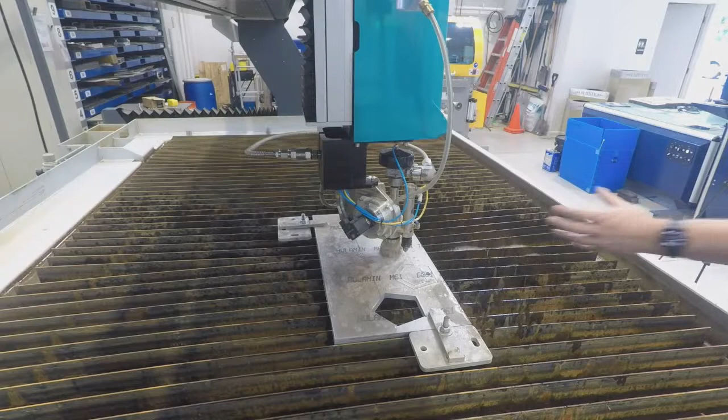All right, so as we mentioned, it's going to cut the inside geometry first. And that was automatically passed by our FlowXpert software. So if you look closely, you can kind of see the A and B motors dancing around for that taper elimination. You can kind of faintly see it, but it is angled a little bit forward, and it is also tilting back and forth to compensate for that taper.

So after it does the inside geometry, it's going to do that hole. That hole we set at 10%. So you're going to see that as it goes around cutting that hole, it's going to be a significantly slower speed. So it's going to stop, and that's going to pierce that hole. Takes a little bit under half a second to pierce.

And we're getting you the live footage from the GoPro. You get to see it right in the action. And now this hole was cut at 10%. That'll give us a nice smooth satin finish.

Now here's the final pierce. So now you should be able to see this visually. You're going to notice that this first angle on this pentagon here, this first line, this cut is at 20%. So 20% cut speed, and then the next side of this pentagon is going to be at 40%. And then 60, 80, and then 90. So you should see it speeding up just a little bit.

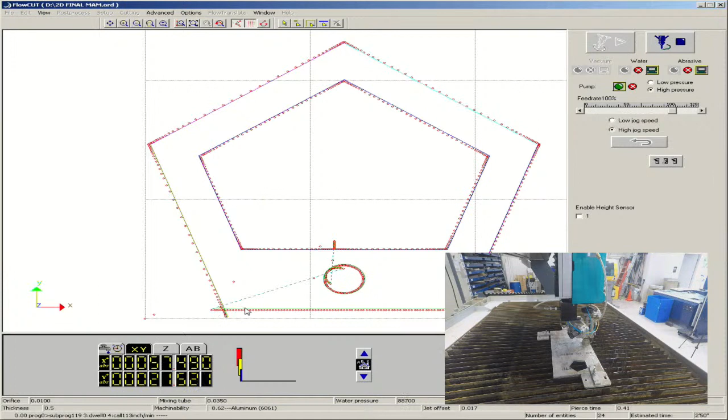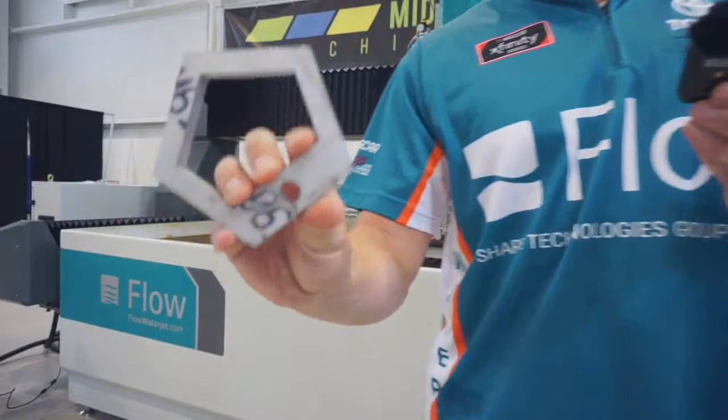And that's it. So just under 3 minutes to cut this part. Let's see how it looks. And something really nice about that taper elimination cutting head is that there is no taper, so that part does not get trapped. It just pops right out effortlessly. So let's see, let's hold it up to the camera here. There we go, look at that.

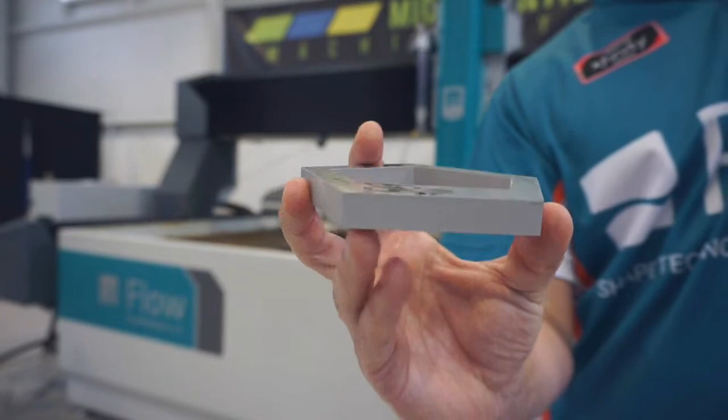Beautiful. So if you look at each edge quality, that there is 20%. And then we got 40% right there. You can kind of see some lines, striations. And then we got 60%. Let's get it focused. There it is. 60%, 80% getting a little rougher. This would be if you're just trying to do a rough cut and then put it on a mill later.

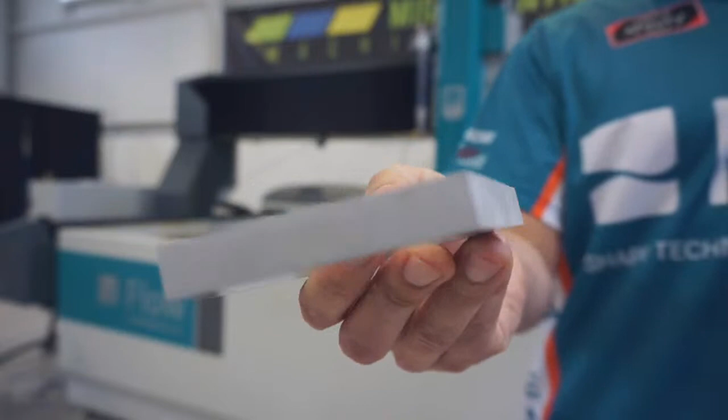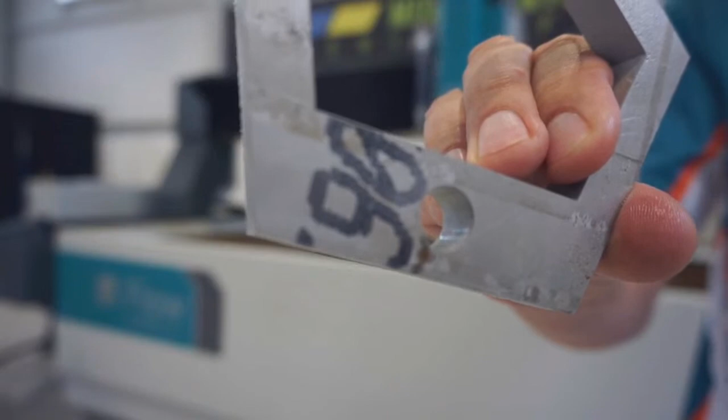And then we got that 90. So you can kind of see it right there. A little rough. So not too bad. And then that hole was at 10%. Let's see if we can get you a good video of that. Look at that. Nice, smooth satin finish. So under 3 minutes. Pretty nice part. And as you saw how easy it was from programming to finished product, it was pretty effortless.

So, we have a question that came in. Someone's asking about what if they're cutting smaller parts? They're concerned about the parts falling into the tank. What can we do for that? Yeah, so great question. So if you are cutting smaller parts, you are able to add a tab. So you can add a tab to restrict those small parts from falling down to the bottom of the table. So putting a tab there will hold that part there, and then you can just kind of wiggle it off and then secondary process it from there.

So what else? Any other questions come in at all? Someone's asking about the slats. Yes. How often do you go through? Do you have to replace them every time you use them? Yeah, so great question. So slats, they are a consumable item. As the water jet cuts through the material, you are also digging into the slats beneath. It all depends how often you're cutting, but maybe like once a year you have to replace them. But like I said, it's all depending on how often you are cutting.

But many people will cut in the middle, and then they'll move it to the left, to the right. They'll move it all over to get life out of their slats. And you can also flip them over. So if the top's getting beat up and cut, flip it over, and then you got a nice clean edge. So when it's time for more, you have a water jet. You can cut your own slats. You got a water jet.

So what else? Let's see what we got here.

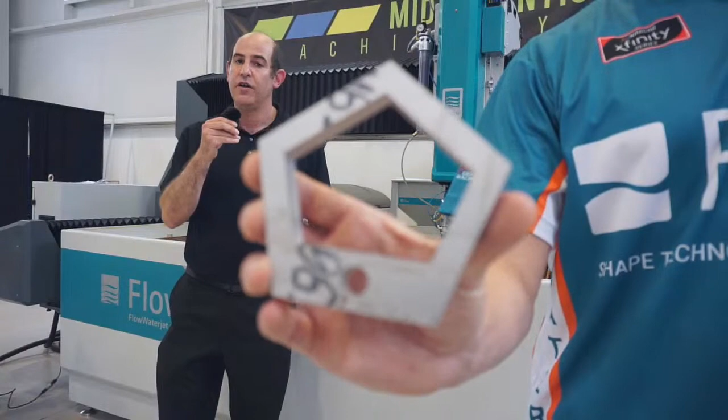Let us show you exactly how this machine is going to perform for your application. We don't want you to take our word for it. We want to prove it and show you why our machines are the fastest and offer the best productivity and profitability of any water jet in the industry.